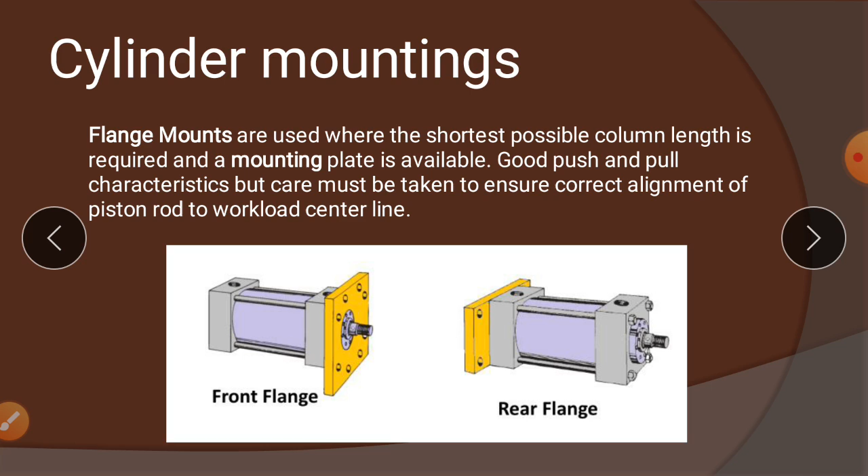So these two types of mountings you are going to use, that is lug mounts. Lug mounting options are rectangular tabs machined from or welded to the same block of steel as the head and cap. So why we use this is

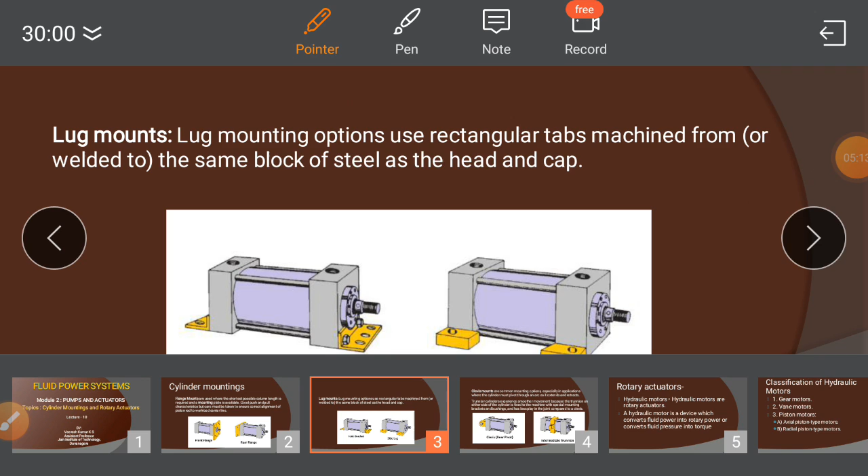okay, students, the lug mountings is one of the types of option where you can mount the cylinder to the side portion. You can see there are the small weldable plates which are having the holes which are mounted such that the cylinders are going to be mounted horizontally. So you can horizontally mount it or you can mount it vertically to any surface.

So these types of mountings are going to give a lot of rigidity to the cylinders, so it has the perfect mounting space, so you can operate at a higher pressure. So that is one of the advantages. Similarly, foot brackets are also helpful whenever you are going to join it to any horizontal surfaces or vertical surfaces. So that type, the lug mounting options are going to be used.

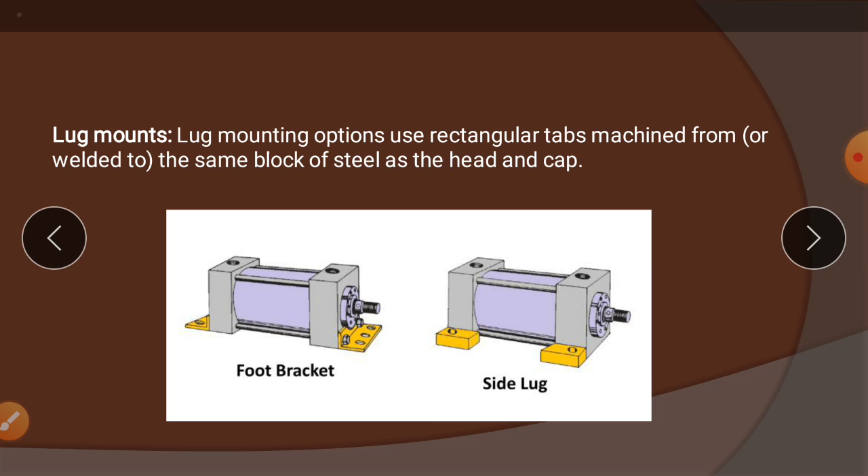So the next two types are Clevis, that is called as rear pivot, or intermediate trunnion. Clevis mounts are common mounting options, especially in the applications where the cylinders must pivot through the arc as it extends and retracts.

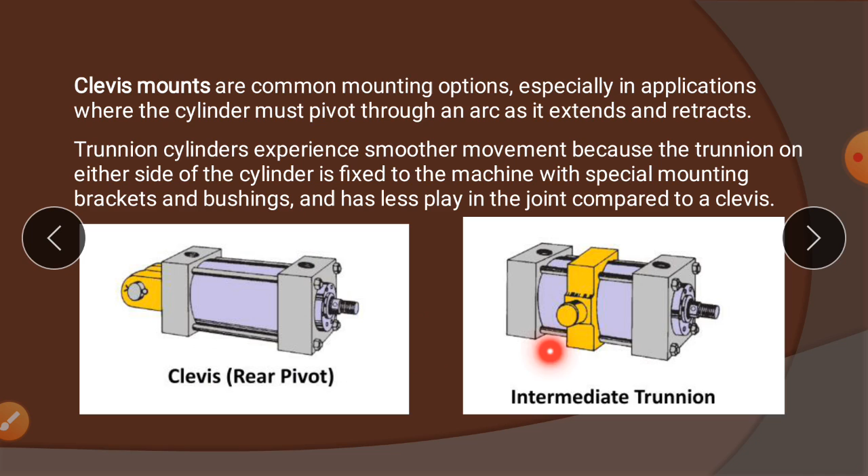Trunnion cylinders experience smoother movement because the trunnion on either side of the cylinder is fixed to the machine with special mounting brackets and bushings, and has less play in the joint compared to the Clevis. Play means it can oscillate through more angle, but it should not have that much angle of reciprocation compared to the Clevis.

So we'll move on to the rotary actuators.

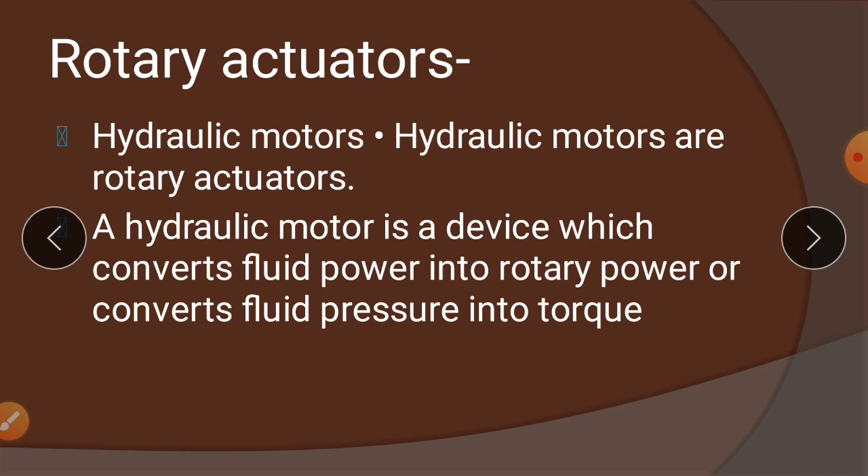A hydraulic motor is a device which converts the fluid power into rotary power, or converts the fluid pressure into a torque. So this is the application of rotary actuators or hydraulic motors. We have some classifications in hydraulic motors: gear motors, vane motors, piston motors. In the piston motors you have axial piston and radial piston.

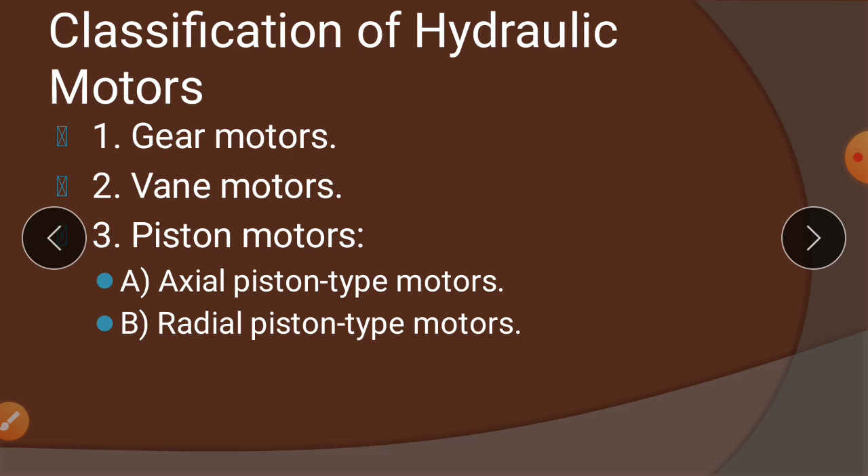So first one is the gear motor. The gear motor diagram is very similar to the gear pumps.

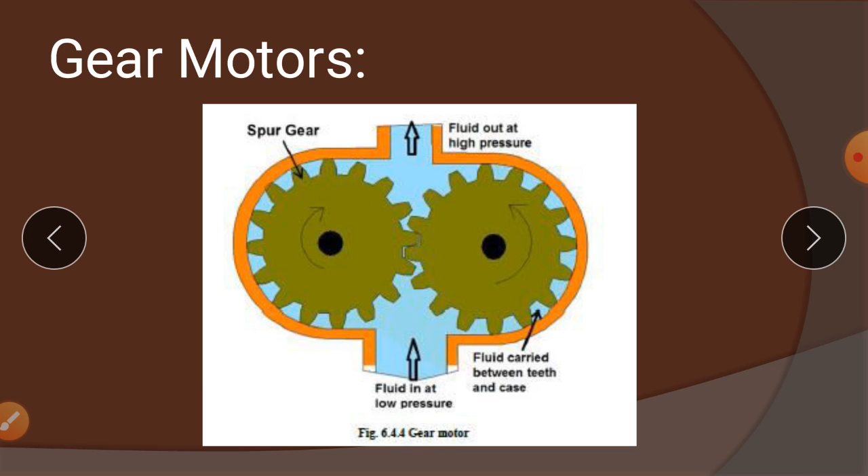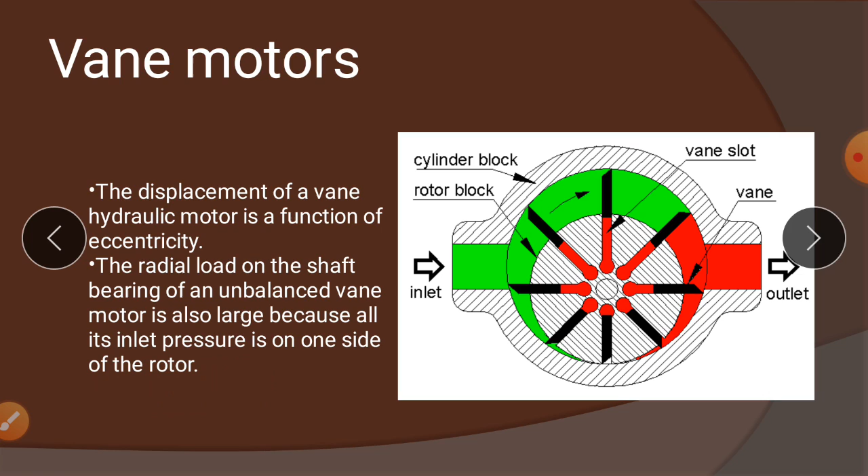The radial load on the shaft bearing of an unbalanced vane motor is also large because all inlet pressure is on one side of the rotor. So there is a radial load because the fluid is pressurizing the vanes, and a radial load is experienced by the rotor block. Because of that the rotation takes place and in turn torque is generated in the vane motors. So next is the swash plate piston motors.

So swash plate piston motor, you can see the diagram. It is very much similar to the swash plate pump. So this is the swash plate and this is the driving shaft. These are the pistons, which are connected to the swash plate. This is the stroke area, and there are inlet and outlet ports provided in the cylinder. So the pressure acting on the ends of the piston generates the force against an angled swash plate.

So the liquid enters here and it will make pressure on the piston. It is having the higher pressure, so it is going to push this piston at the end, and this piston is connected to the swash plate through the connecting rod. So it also forces the swash plate in an angled motion. This causes the cylinder block to rotate. As this pressure increases on the piston end, it guides this washer through the swash plate, and because of the sliding of this swash plate connection, the cylinder block provided here will rotate with a torque.

This is proportional to the area of pistons. As the area increases, the area of pushing of the liquid increases. Because of that the torque also increases. So the torque is directly proportional to the area of the piston. The torque is also a function of the swash plate angle. As the swash plate angle is more, the torque is also considerably more. If the angle of the swash plate is less, the torque is also comparatively less.

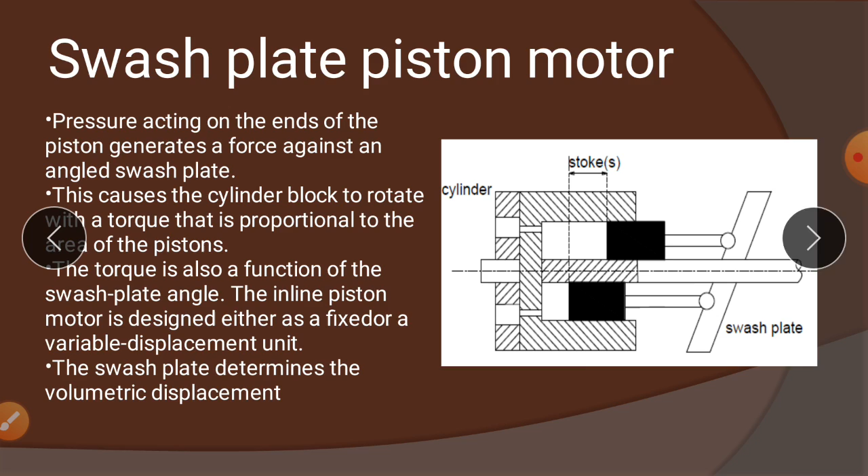The inline piston motor is designed either as a fixed or a variable displacement unit. You can make it a fixed type or variable displacement type by changing the angle of the swash plate. The swash plate determines the volumetric displacement. As the swash plate has a higher angle, the volumetric displacement is high. If it has a lower angle, the volumetric displacement is low. So next is the bent axis motors.

So how is a bent axis motor? The axis of the cylinder block is not aligned with the driving shaft. It is not correctly aligned with the shaft.

It is at some angle. So this is the pistons which will reciprocate inside this rotor block. This is the shaft which is at some angle.

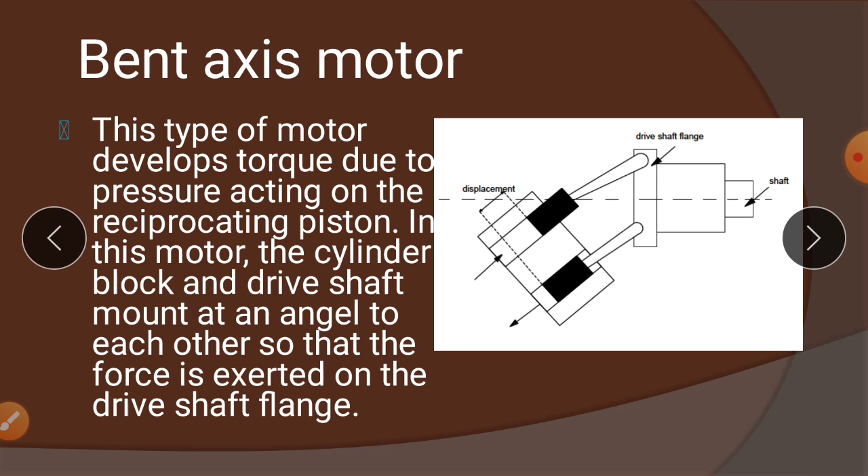In this motor, the cylinder block and drive shaft mount at an angle to each other so that the force is exerted on the driving shaft flange. So it is mounted at an angle. As the pressure is acting on the piston, it will transfer that rotary motion to the shaft, and the torque will be generated in the bent axis motor. Okay, one of the differences we have to consider here.

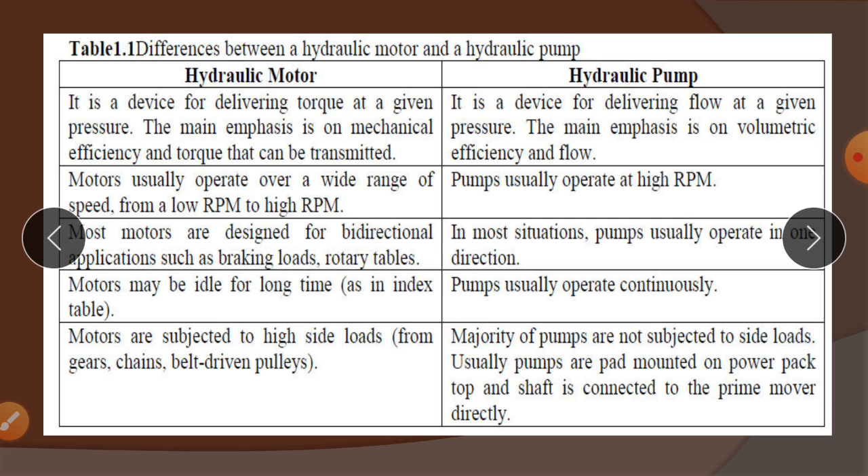Hydraulic pumps. Okay, thank you students. This is all about module 2. We have some problems regarding module 2, but I think that is not necessary.